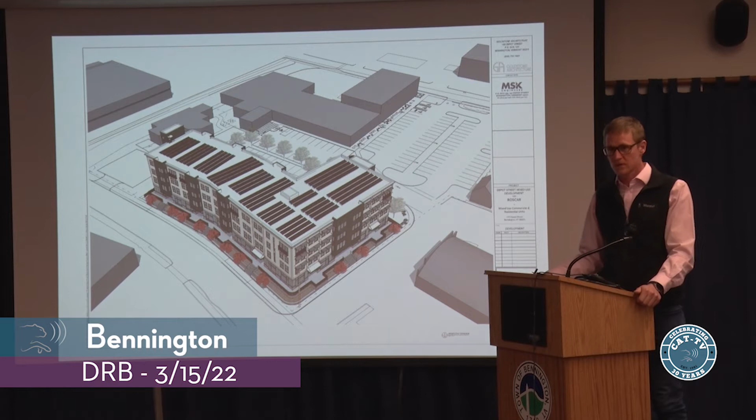Good evening. My name is Jason Dolmich. I'm with MSK Engineers. I, along with Jeff Goldstone from Goldstone Architecture, am representing RGN Bennington Holdings of Bennington. Paul Carocchio, a member of RGN Bennington, is here to present. Tonight we're proposing a 60-unit mixed-use building located at 113 Depot Street. This project, I believe, is the first designed in accordance with Bennington's downtown form-based code. And I will allow Jeff to speak more specifically about the building related requirements.

But with respect to the site, we have created a high-density pedestrian-oriented design locating the building right along Depot Street and adding continuing pedestrian access along Depot Street and connecting pedestrian access to the parking area and the areas in back of the structure along the alleyway that's owned by the municipality. We are also public realm compliant by constructing concrete sidewalks, plazas, street trees, as well as a sitting wall along Depot Street in front of the building.

There's some additional parking that's being constructed of approximately 42 spaces. And in accordance with the standards, we've provided minimum shade tree and landscaping requirements. One thing to note, the structure is located in the floodplain. It is located 1 foot above base flood elevation. We've submitted all the information along with the elevation certificate to the floodplain manager and have received no negative comments back from the state floodplain manager. And with that, I'm going to hand it over to Jeffrey to speak more in detail about the structure.

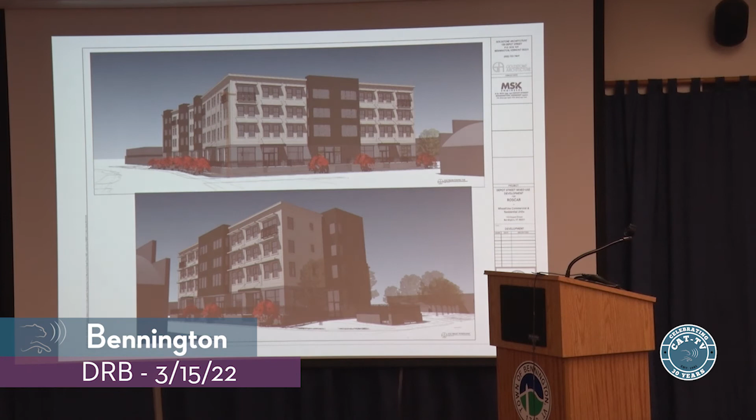Thanks for having us tonight. The building you see here is illustrated from 2 points of view, and there are a couple more points of view we'll show you in a moment. From the south along Depot Street, looking north, so we see the Depot Street elevation as well as the south-facing elevation on the small alley. And then looking from within the alley more towards North Street, looking further to the west, seeing the same facade from that direction.

I would like to briefly touch on some of the items that Jason mentioned about the form-based zoning and how we address those issues. We are trying to present a facade that is both appropriate for a historic district, using modern versions of materials that may have been found in a historic district, and then certain modern elements to juxtapose with those historic materials, something that the form-based code encourages. So we are looking at horizontal fiber cement siding, which is illustrated in the cream color, and the vertical siding is a steel corrugated siding.

The base up to the top of the first floor is clad in granite with storefront windows looking into the commercial spaces within. Jason mentioned that we are constructing the first floor 1 foot above base flood elevation, which is approximately 4.4 feet above the curb elevation. And we have broken down that 4 foot plus between the sidewalk and the upper sidewalk with a series of planting areas, stairs, and ramps.

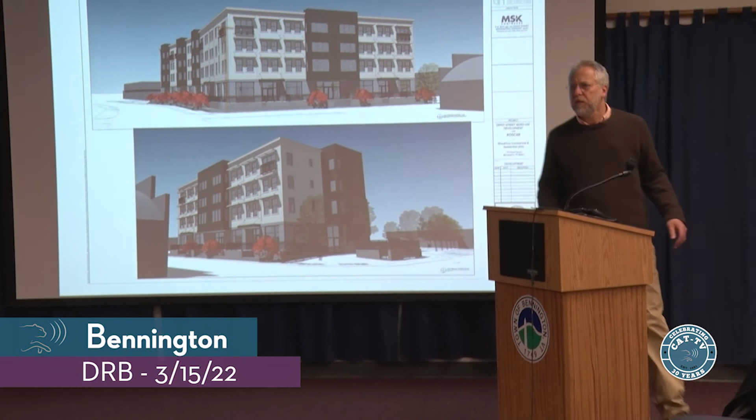And then also on the previous slide, I think it was A901, is that on the lower portion, is that the dumpster enclosure? There's a dumpster enclosure here. Yeah, that's correct. But on the other drawing, on the condition C101, it looks like it's in a different location. Or am I reading that incorrectly? No, the top. It's right here.

Okay, I guess I was looking at the... And we're proposing the dumpster enclosure to have, I didn't mention, the material of the walls between the top of the curb and the upper sidewalk would be board formed concrete. And we're proposing a board formed concrete base and then steel rails comparable to the steel rails we find around the walkways and on the upper balconies to surround the dumpster enclosure.

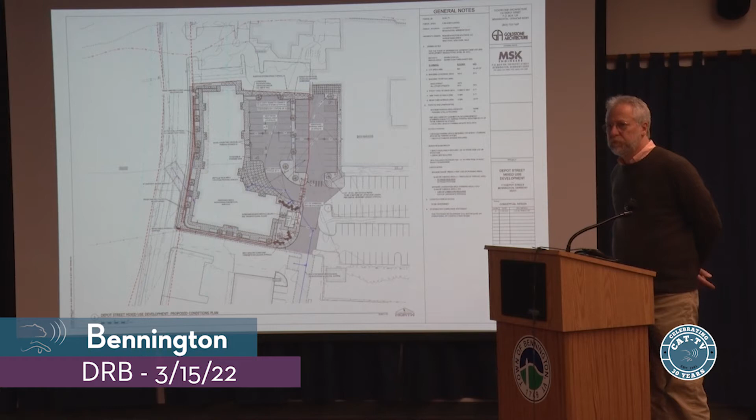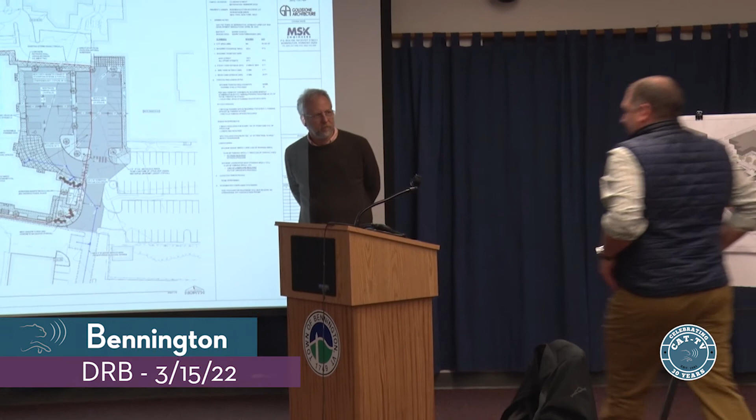And I guess finally, you're anticipating all the residential units will be market-priced units? I'd ask Paul to speak to that rather than me. Can I speak? Yep, you have to go up and sign in. He's signed in. Hi, I'm Paul Carocchio, Secretary of RGM Bennington Holdings. The interior component will be residential in nature, and we've applied to the state and gotten approval for an allocation of 20% of the residential units to be affordable workforce housing. Okay, thank you.

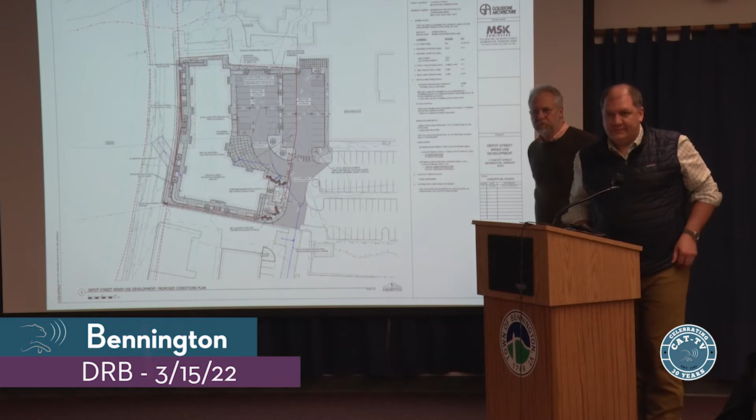Anybody else? Good questions. Anyway, are there any other buildings that high in the design review district that you know of? In the architectural design review district, actually, Catamount School is about 14 feet higher. More than four stories? It's also 4 stories, but it has a peaked roof. The apartments on South Street are not in the design review district. They're higher. I can't tell you definitively. It sort of looks to me, and it probably isn't, like it'll stick up like a sore thumb amongst all the other buildings in that district.

Can I mention something that, I don't know whether it made it into Mike McDonough's letter to the board, but it was mentioned during the HPC meeting. Is that appropriate for me to mention? Sure. It is taller than its surrounding buildings. It is not taller than the building height limitations in your zoning ordinance. There is hope that in phases 2 and 3 of the Putnam block there will also be taller buildings constructed, and this might, in effect, be context for those. Obviously, they aren't context for this one. But yeah, it is taller than the surrounding buildings.

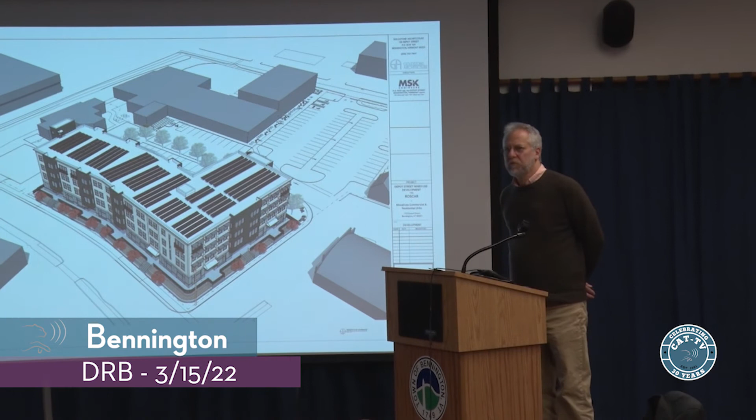Oh, one more thing. The parking spaces, that's also in conformance for 42. But there's going to be 60 residential places and several commercial spaces, businesses. If someone owns, let's say, a 4-unit apartment house, they need one parking space off street for every unit, 6, same thing. But this somehow is in compliance. There was an explicit and intentional change to the parking requirements to allow the market to set the number of parking spaces required for projects within the downtown district. That was very explicit and intentional to increase density within our downtown.

Is that a new section? I thought I read a new section of the bylaw. Is that in there? Yep. Yes, there are no parking requirements. Catherine can attest, I know she wrote it. And Robert voted for it at the planning commission.

So if you look at downtown, and this is not relevant, but I feel it's important to mention, if you look at downtown, there is an exceedingly excessive amount of parking for the amount of cars. Downtown, right here for these apartments that people live in. Well, the Bennington station lot is nearly empty almost every day. That doesn't belong to the same, but it's a public lot.

Yeah. Same complex. I will say it was a very intentional change. So strictly speaking, there are no parking requirements in the downtown form district. It's considered best practice in planning.

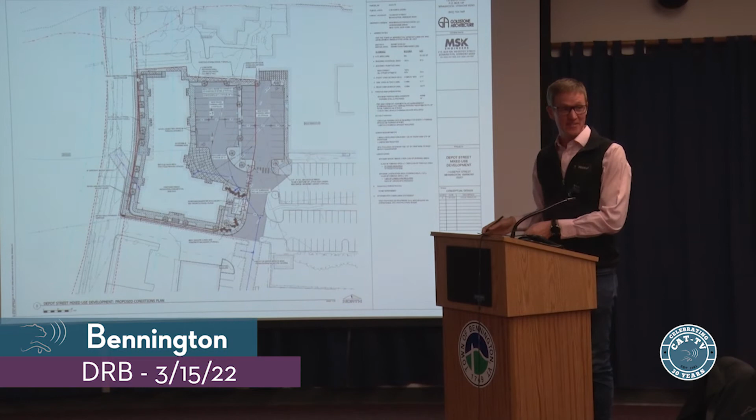You want to answer that, or you want me to? Oh, I assumed that Paul would answer. Yeah, you can go. You can if you want to. I'll just give you the generalization, and he'll give you the specificity. Sure. Okay.

Thanks. Okay, so parking in downtown Bennington, according to Dan and the bylaws, there's no parking requirement necessarily for a building of this size. It happens to sit between two downtown Bennington parking lots that are underutilized. One is over here at the bottom, which is not on the plan, next to the Town Village Distillery garage, and then the other is behind Jason and Jeff's train station building. In combination with those two lots and the 40-plus parking spots, there are in excess of 200-300 spots.

So we felt that having the property available to do this type of development versus other properties in town that aren't available, and proximity to these two parking lots would justify that someone who lived in the spaces may not have cars, and if they do, the distance is about 100 feet from the corner of the building. So if you can walk 100 feet to park your car, we thought that'd be reasonable. Jason can probably give us the actual specifics of why we did that. But that's my generalization of it. I think there's way more parking spots down in Bennington than there are for demand.

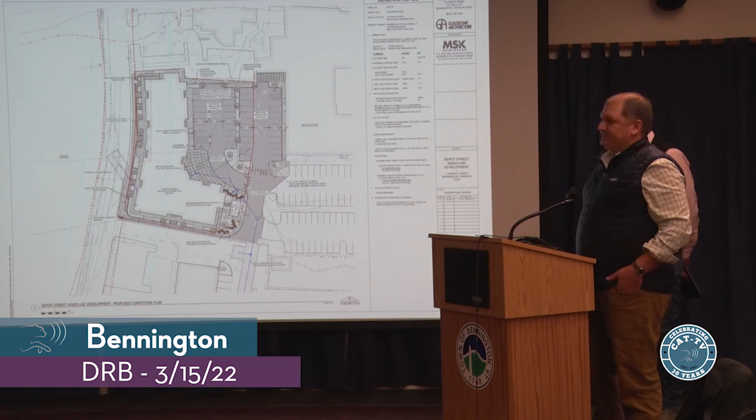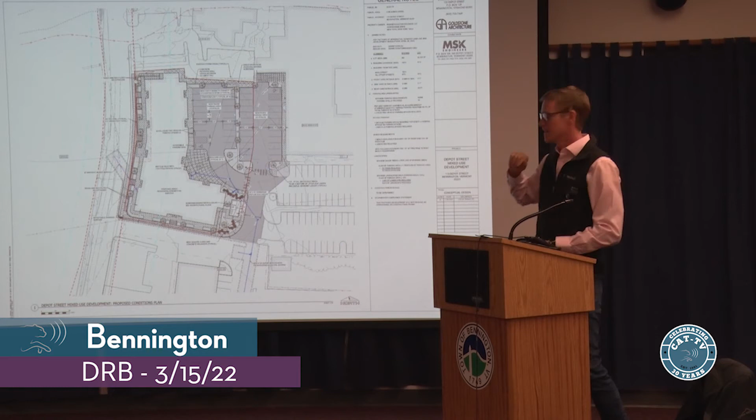Thank you. So I can't rattle off specific utilization rates for every single parking area in the region, but what I can say is I believe there was a 2013 study by BCRC, which looked at basically the available area square footage in the central business district in which this was located prior to the form-based code calling it the downtown district. And that found, I believe, that upwards of 50% of the central business district is actually covered in pavement, and that the utilization rate of all parking lots in the region were below 50% on average.

So when we were helping RGN develop this proposed development, we took very seriously the mandate that requested density in the central business district in order to utilize the space to its fullest extent possible. So we provided a building that was of an appropriate width for double-stacked residential apartments, and then we finished the rest of it with parking. But in theory, we could have made a larger structure that had more density with no parking. And I'll just leave it at that.

I've got a couple more questions on parking. Sure. I'll get mine over with, because they're all along the same line. So first is a quick one, just to help me understand. I know there's some standard in the regulation that talks about planning for future connections or current connections to adjacent parking lots. So obviously, that's going on to the east towards the VA facility. And then I just noticed it's kind of puckered out at the top towards GVIX. So is the parking lot puckered that way to potentially facilitate a connection to that adjacent parking lot? Or is that just for parking maneuvers?

And actually, before you answer that, can you clarify the lot of Dionysus Holdings, WJT, where the VA clinic is? I'm sorry, Jason, that lot that is on the right, that's a private lot, correct? So the public doesn't have any right to park there, if I'm correct. Correct. Municipal lots in the immediate proximity are here, and the Bennington Station lot, which is less than 500 feet.

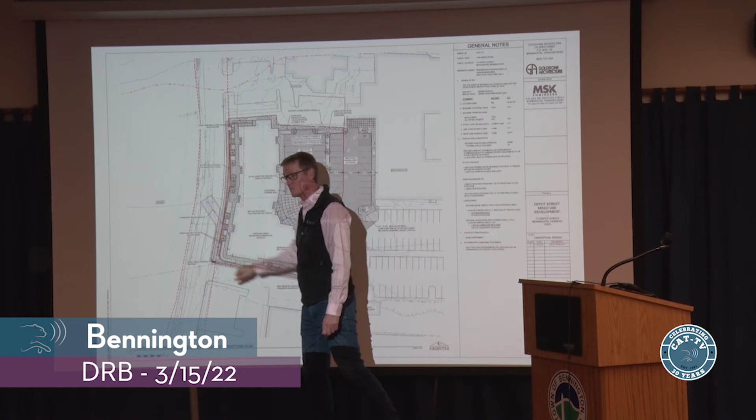This is the property boundary of the parcel. And Catherine, as you mentioned, we've provided interconnection inside here. We are not proposing a connection with GVIX.

The parking lot expansion is proposed between these two areas, in part because there's a shared control of these two parcels, and the goal was to create an interdependency between these areas here. And also to just maximize the available space inside the building complex area.

Yeah. Great, thanks. Sorry, just because I know it's a standard about adjacent ones, and I know you're doing it really well here, so I'm not being stubborn and saying you have to connect, but I appreciate you walking through that a little bit for my benefit.

Can I point one thing out? I'm sorry. Sure. Where there's no sidewalk before, we've created a lower sidewalk here. Of course, there is the sidewalk along Depot Street, and there's a crosswalk just north of here. We are connecting the interior of the building through an exit in this location and an exit in this location to both of those parking areas. So it's rather easy for somebody to exit the building in those two directions.

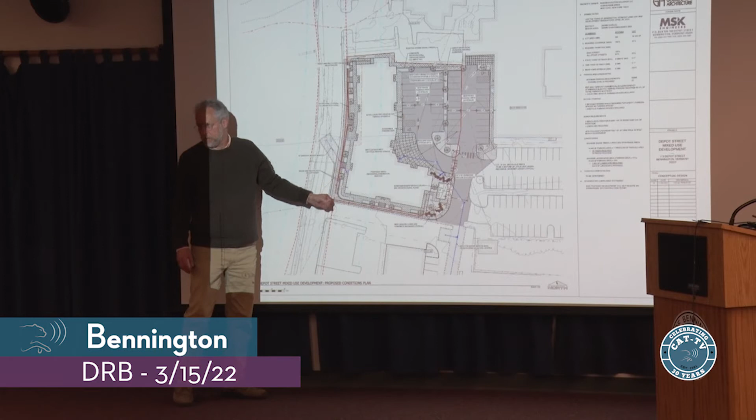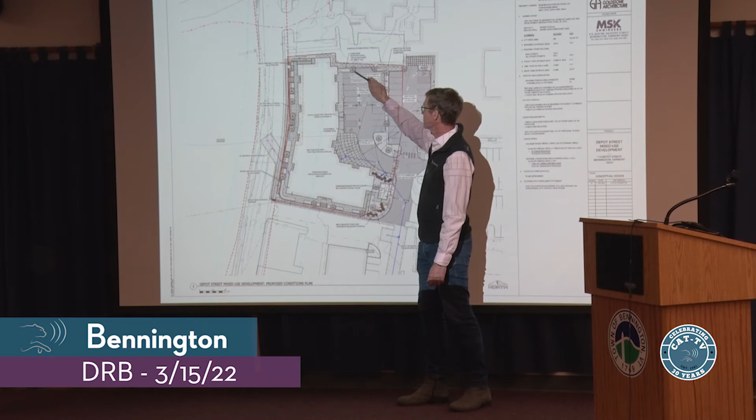And of course, there's an upper sidewalk that's continuous around the front and the south side of the building as well. And I can provide a more satisfactory answer, because that's a very brief statement, but because of the floodplain requirements in here, and because we wanted to meet the floodplain standards of being 1 foot above base flood elevation, this parcel here has a retaining wall because we want all of this to be accessible, right? And so that created an elevation change between the two. Got it. Okay, that's helpful. Thank you, Jason.

Okay, I have one more question, which is another section of the bylaw talking about parking and loading. And Dan can correct me if I'm reading this wrong, but it says development that is accessed by public transit must indicate a bus shelter on their site plan unless it's waived by the DRB. And I did notice that the blue line goes down Depot Street. So I was just wondering if you guys had factored that in at all.

We had not. We had not imagined a bus stop at this location. That is section 310D2. And so in general, unless Green Mountain wants it, I believe we would be requesting a waiver for that. I know that there's already a stop a little bit to the south and a little bit to the northeast, but I don't know if there's a structure like this is getting at.

There is a threshold in the language. It says where development will require frequent or regular loading or unloading of goods or people, then there's this requirement to consider a bus stop, a bus structure. But again, it can be waived. Given the fact, Paul, you spoke to this, that there's maybe a hope with there not being a lot of parking capacity on site, maybe there will be more people using public transit. I thought I'd bring that up.

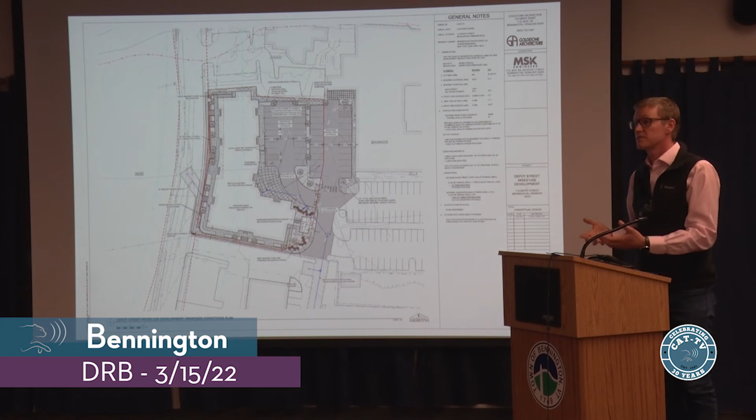And I think the code really supports that value statement and that planning initiative, and that's why I will be perfectly honest with you that I do not believe that there is a requirement for us to look in depth at the potential of parking congestion in the downtown region, because if we reach that problem, we can make adjustments collectively.

Okay. I hope that answers your question. Devil's advocate here, that's all. What if the... Yeah, no, I understand.

Thanks. Robert? I'm sorry. Yeah, can you tell us a little bit about the green stormwater management specifically? Can you quantify what a modest reduction in the impervious historic area is? Yes, to the extent, what I can say is that every bit of landscaping that we're adding to this project is a reduction in impervious area. I think right now what you see on this site is a brush hogged area, but the underlying nature of this site is still to this day the old Tuttle's lot, right?

And if you look at the historic photos of this area, the entire thing was either structures or yard. And so from our perspective, every piece of grass that we add, we're reducing the demands on the stormwater. The other thing that I would point out in the context of this site is that we are directly adjacent to South Stream, and the contribution that we're making to the river in this sense, we are still essentially reducing that contribution no matter what we do because we are adding landscaping.

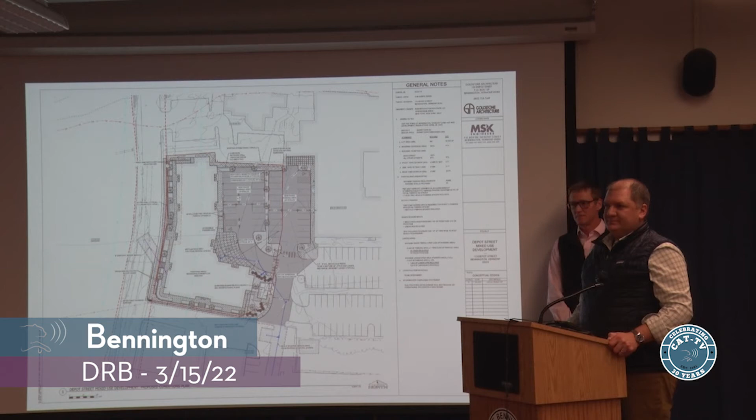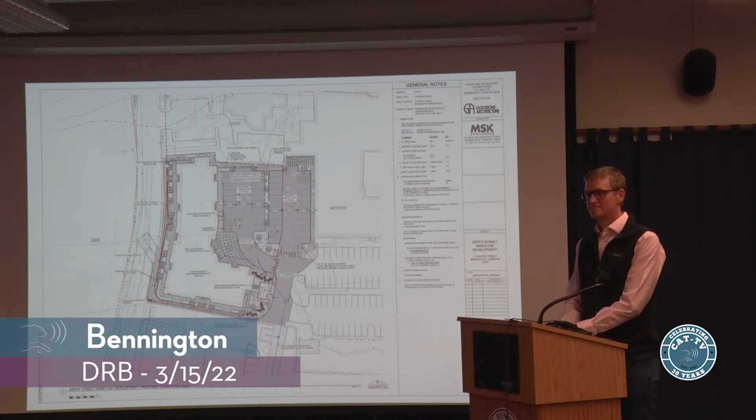Are there any other questions? Do we have a motion before the board? Oh, I'm sorry, public questions. Wendy, please sign in. I forgot about that. It's been a long time since we've had public comments. I apologize. Okay.

Okay. Good evening. My name is Wendy Klein-Faller, and I'm here as a spokesperson for my husband, Bruce Faller, owner of Faller Music, who couldn't be here tonight. So forgive me, I have to look at my notes. I asked Bruce to tell me exactly what questions he wanted me to ask. And so I am here to ask, on behalf of Bruce, whether or not the group that has proposed this has studied the water flume. Don't ask me the background on this, but the water flume.

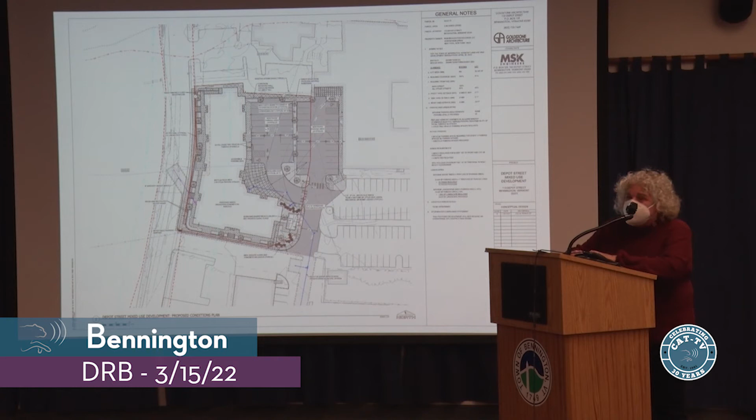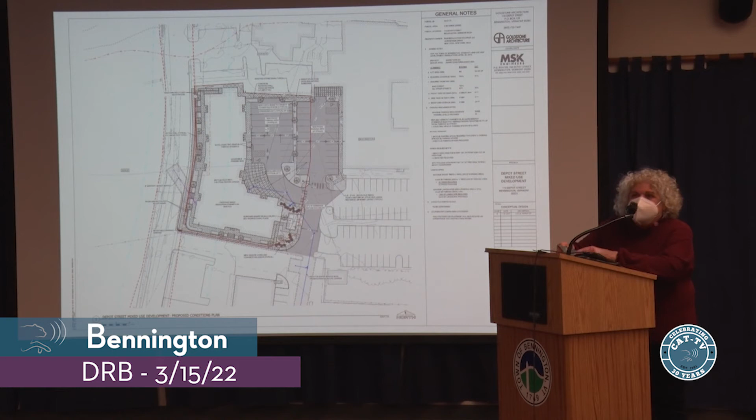His concern is the flow of water that runs across North Street into his building, and the potential for the foundation to block or change the direction of that water flume. And so that's his question. Jason, would you mind just covering maybe the water permits that you've applied for? So if I hear this correctly, Faller Music's concern is flooding on North Street.

Jason, I think the question, and I'm not sure it's relevant, but it's been asked, so it's appropriate to answer, is whether or not there's a waterway or pipe or flume, so to speak, under this proposed building that would be impacted by the foundation, excavation, et cetera. Is that accurate? That's closer to his question, yes.

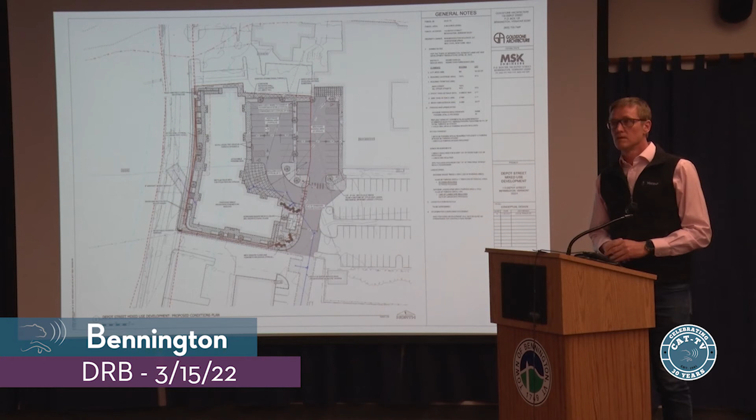Okay, now so when you say, so I just want to make sure I understand this, and I know that you're speaking for Bruce, so I understand, but the concern is flooding on North Street, water, underground water flowing underneath the site and across the site. No, it's blocking of underground flow is the concern, am I correct? Or changing the direction. Or changing the direction of the flume so that it negatively impacts.

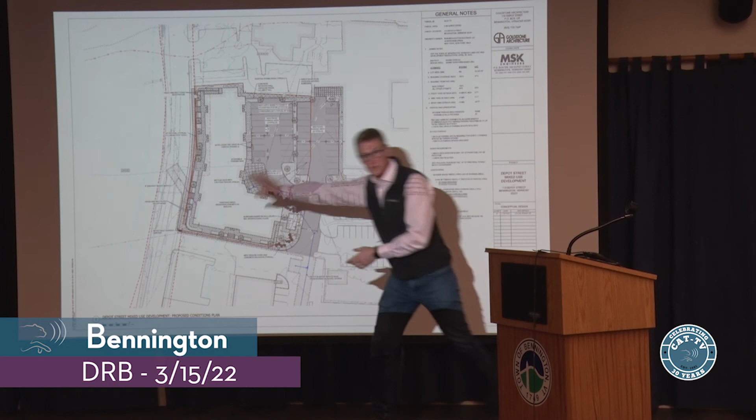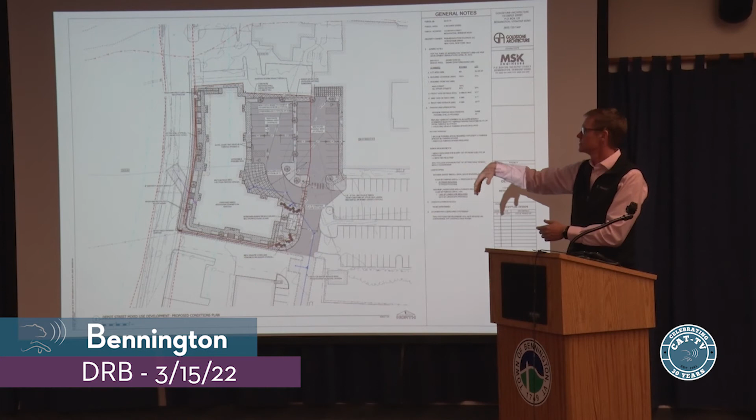Okay. So, one, I would just state that this structure is located downstream, right? So North Street is higher than Depot Street by about 8 feet. So your hydraulic gradient across the site is high here and low here. And this structure, as it stands, is not going to do really anything to change groundwater flow in downtown Bennington.

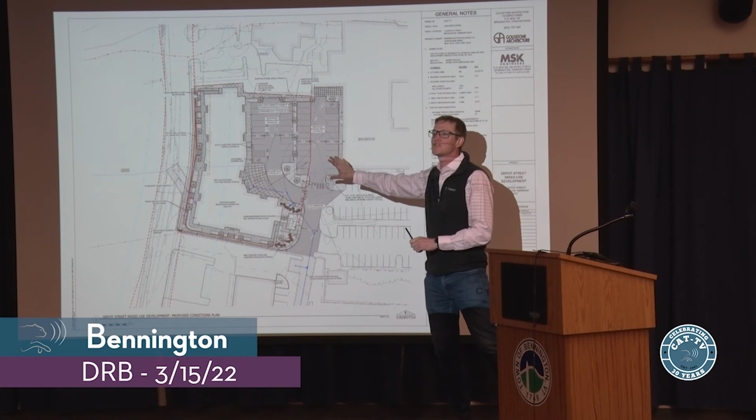Jason, I think there's a miscommunication. So it's not about groundwater. It's about, like across the street where there's an underground river. I think the question is, when you say river or flume, are you meaning structures? Yes. No, we are not going to inhibit passage of underground water in structures. There's several structures here, they're all running across the site. Okay, so the foundation will not impact them as well. Correct.

Okay, thank you for clarification. I didn't understand flume. Translation. I had trouble with the word flume, so my apologies. Okay. Sir?

And please state your name and town and sign in. I am Sean Clark. I'm with Obashan Realty Company. We own the abutting property directly across the street, and I'm duly authorized to speak on behalf of them. Just a few issues we have. Do you want me to just go one by one, or just rattle them off? Why don't we go through them all, and then we'll ask the parties to... Okay.

Back to the parking. We had an engineering company, third party, look at this, and any way you look at a project like this, it needs 144 spots. I'm seeing 42. We're the lot across the street. We fear that with the overflow, our lot will be their parking lot, whether it's through the retail, the commercial, or the residential. So, I don't know if anyone wants to speak to that. I think if you just go through all your questions. Sure.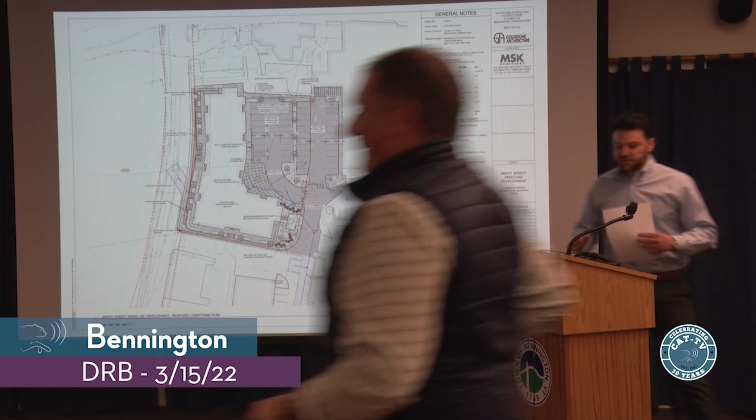I think on the parking issue, the town requirements actually are 0 parking spaces for this development. So the fact that there are 42, I think is right. Our concern again is we're directly across the street. There's no way anybody can look at this and say we're not going to be used as a public lot, because this is underserved for parking. But that doesn't change the town requirements. Right. ITE studies say 144 is recommended, and that's 100 spots under.

And as I mentioned earlier, the lot that is to the right on the view here is a private lot, so. Yep. Sure, they should have a similar concern. Kind of in the same boat, I guess. Right. So, just wanted to bring that to your attention. So maybe, Jason, are you going to take those questions? Sure. So Jason can answer those questions, and if you have follow-ups, then certainly do that. Okay. Jason, you want to go up to the...

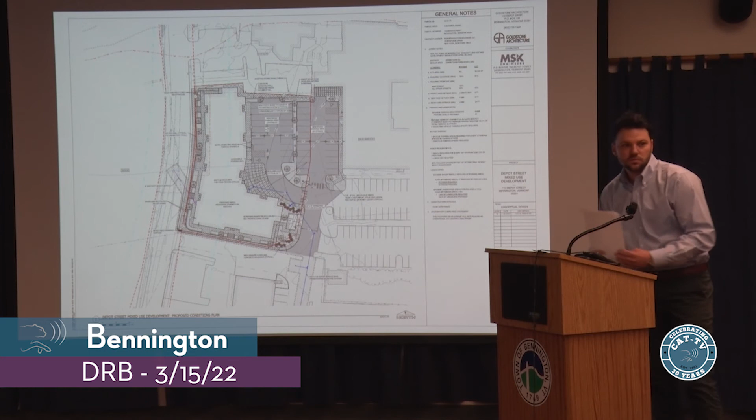With respect to the parking, I don't know that I need to rehash the statement. At this point, we've stated our position on parking. We believe we're in compliance with the spirit and the code. The same falls for traffic study. This is in a downtown district. This is primarily residential. It's going to be served in the context of the central business district.

With respect to stormwater runoff, as we've noted before, we aren't principally modifying the runoff of this site, particularly given the fact that this site has historically been 100% impervious and is located on the South Stream. Well, the Walloomsac River in Bennington has a drainage area of 140 square miles, of which the South Stream is a part. And any modification to this site will have no appreciable impact on South Stream.

I don't really understand the statement about life safety. We have evaluated vehicular access for service vehicles. This site can take a tractor-trailer truck, but there is no tractor-trailer truck loading dock for any of this site because we did not believe that it requires one. We have a modified pedestrian entrance for this structure; that was really the only loading dock requirement for the parcel.

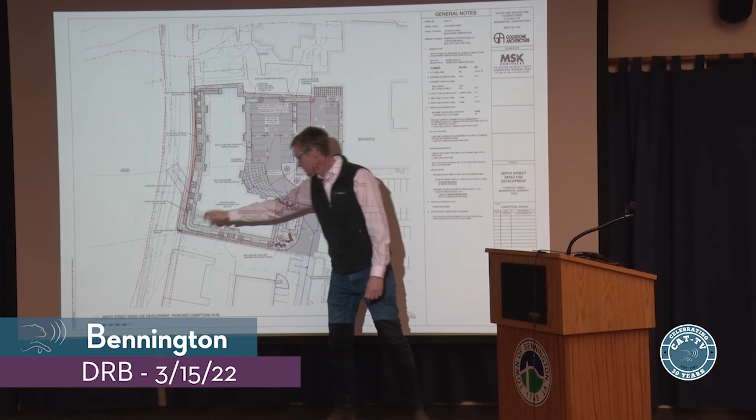I will note that this site can be accessed for emergency vehicles from this area as well as North Street. And there's another access point down here through the parking lot. So there's essentially an unobstructed flow of traffic to this area. But if you could clarify your question about life safety, I might be able to answer it.

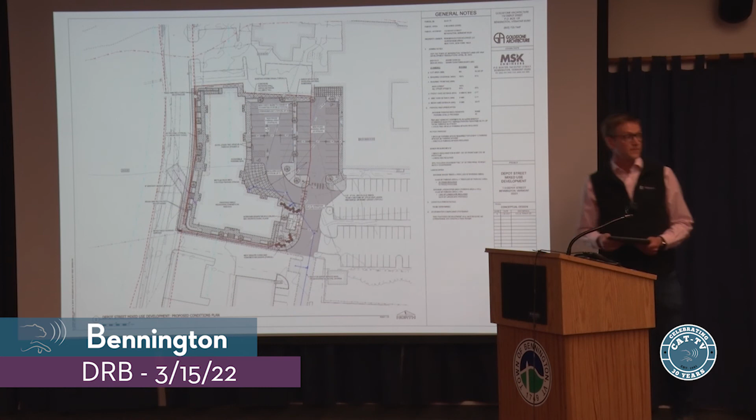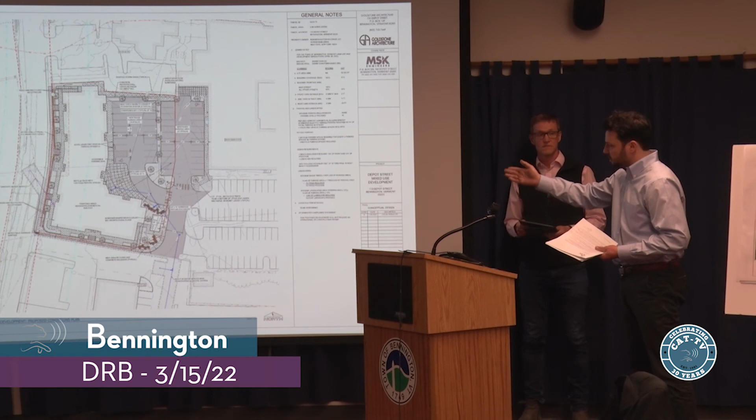Yeah, it was a two-part question. There's nothing that outlines a three-point turn on this rendering. I don't know if it's possible or not, but generally you outline one. Same goes for a fire truck as well in the back. I mean, you can't access two-thirds of the building with the current form. I would disagree with that statement. Okay. But again, that's nothing further. Okay, thank you.

Charlie? Again, please state your name and your town.

My name is Charlie Jingo, and I chair the board of GBIX, the building that's just north of the proposed new building. I would appreciate answers to several questions. We have a water line easement for this property, so I would like to make sure that is not going to be impacted by the new construction. I believe, but I'm not absolutely sure, that the sewer line goes through the GBIX property, and I want to hear comment about the sewer line.

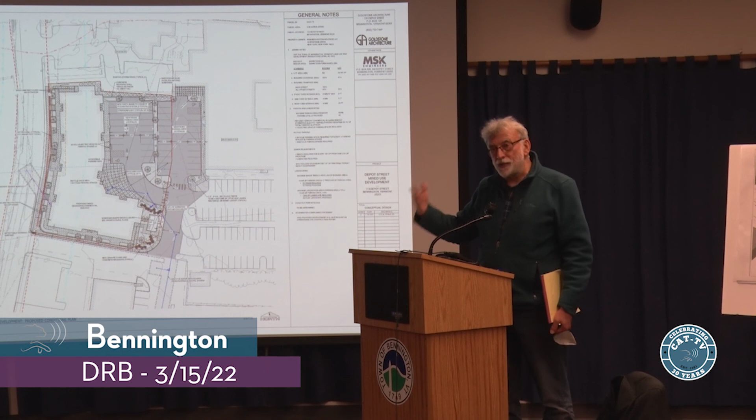So water, storm, sewer, and I guess the fourth one, I remember when it was the Tuttle lot, when Tuttle's was there. I couldn't quite hear it, it may have been mentioned: has there been an environmental impact statement on the property? Because I know that there were oil tanks there, among other construction industrial things. So I would appreciate comments on those 4 points. Thank you.

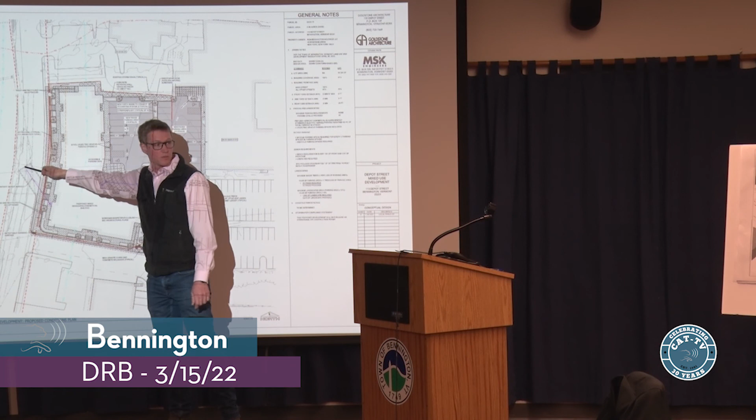So firstly, to the question of the water line easement, that water line easement has been accommodated. If I'm not mistaken, it essentially runs here in front of the structure and then over, and that can be maintained. The sewer line for this structure is proposed here, and it's a proposed new connection on Depot Street.

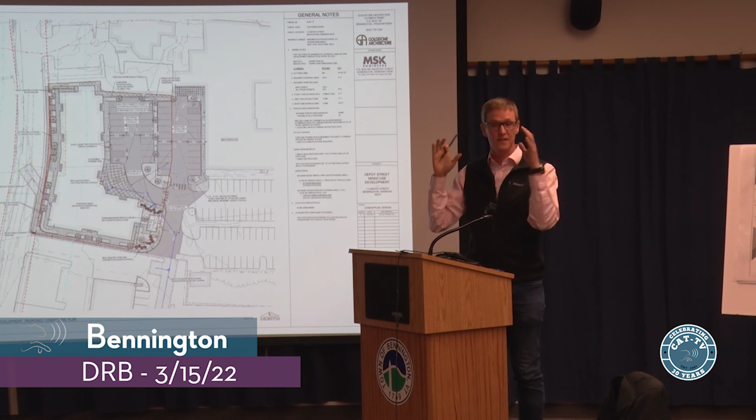And then with respect to solar impacts, if you're having a solar evaluation done on your parcel, we'd be happy to provide any of the details about the building so that the person evaluating it can evaluate your solar with respect to the new structure in front of you. That would be the best thing for you. And with respect to environmental impacts, it's had a phase 1 and 2, and it's got a SMAC letter on it. Thank you.

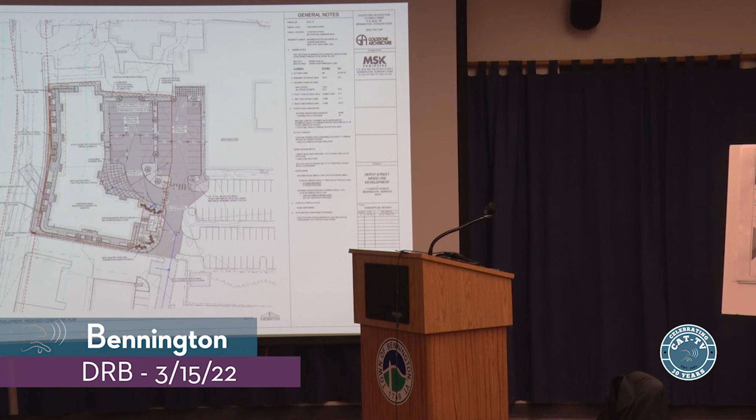Ma'am, would you please go up to the podium, state name and town, and sign in, please.

Nancy White, Bennington. I'd be interested to know the breakdown of the 60 apartments. Are they all going to be one bedroom? 42 parking spaces. How many will be handicapped? Do you want me to stop or? I'm sorry, I was just confirming. I don't know how you want me to do this. Nancy, I think it's best if you go through them all. Okay, it's helpful, because it seems to be working fairly well.

Dan, just so I'm clear about this, the parking requirements for the downtown were eliminated last April with all those zoning changes? It was eliminated when the form-based code was adopted. When what? When the form-based code was adopted, I believe that was in April. But your memory's better than mine. But when the select board approved all those zoning changes, okay. Yes.

So the public has no idea about this. Well, there were several hearings, Nancy, so, yes. Well, sure, the two planning commission hearings. I was at the first one, and I was very concerned these plans were going to get pushed through without the public having any idea, and that's what happened.

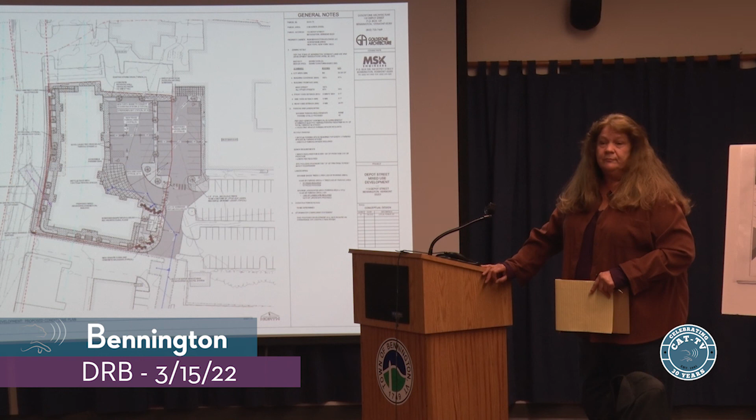Nancy, just to clarify, the DRB's job is to apply the laws that are on the books. Just to clarify, the DRB's job is to apply the laws that are adopted. So your comments are not relevant for this particular hearing. So unfortunately, all this is legal because it got shoved through last April. It's legal because it followed the appropriate process to become law, yes. Well, 20 minutes for all those huge zoning changes at one select board meeting was not appropriate.

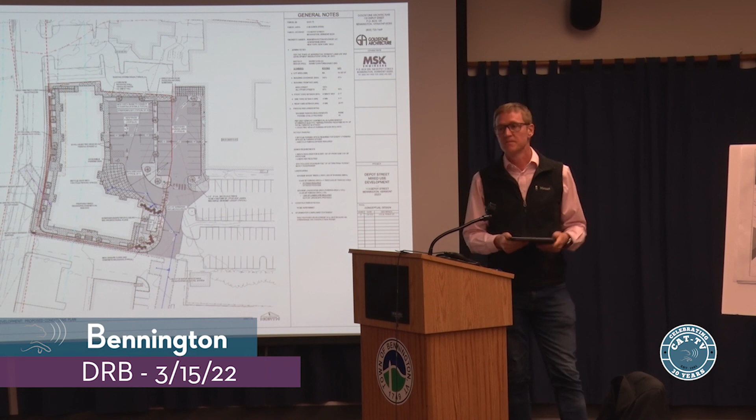So, Jason, I think we've been over the parking issues. And thank you for your comments. We do hear them, but if you would answer the other. The only question was on the makeup of the apartments. Right. And right now, it's just going to be a mixture of studios, 1s and 2s. How many? I'm sorry. It's a blend of them. So you don't have a final number? I don't have a final number on each classification, no. And handicapped?

The number of handicap spaces, there's 2 additional handicap spaces provided in those areas. Two handicapped? Correct, that's what's on the plan. And again, because there aren't even any parking requirements, the 2 meet the requirement. The parking requirements, I believe, still apply. It's like 1 per 26, if I'm not mistaken. And you have 42. So, 2. Thank you.

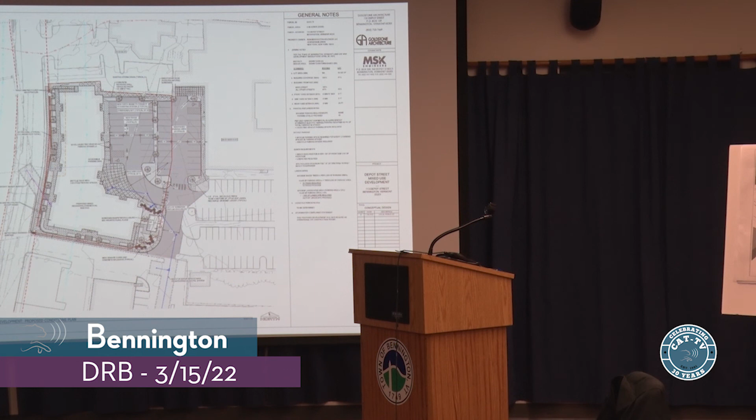Any other public questions or comments? Board? Moving on to deliberative session. So there's been a motion and a second for deliberative session. All in favor? And just so everybody knows what that means, the board will go in and deliberate on this particular application, and they will not come out of the deliberative session, but they will give the information to me. I will draft up the findings and the decision, and it will be a written decision sent to everybody who spoke at the meeting tonight, and it will be available to anyone else in the public who wants it.

And Mr. Is it Sean Clark? Yes. Okay, and you're with Aubuchon Realty. Just want to make sure that I include you, so you'll get a copy of the written decision as well. All right. Thank you, people. Appreciate it. Do we have a motion to adjourn? All right, so all in favor? Jane and Kevin, there's a motion to adjourn to a deliberative session. Thank you.